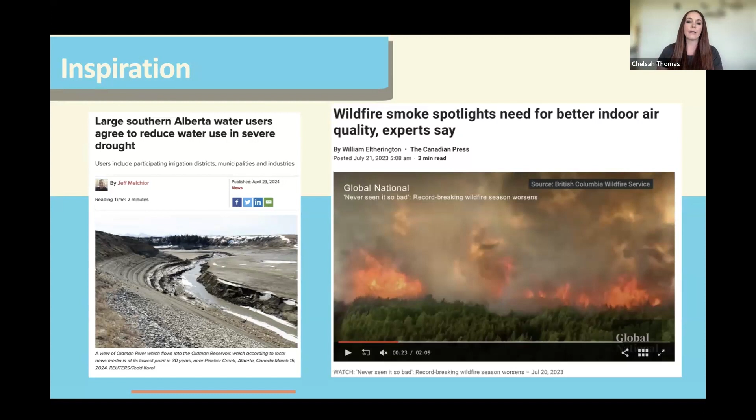So as I mentioned, myself and my partner run Sol Invictus Energy Services. We founded in 2016, and the development of our company was based on the premise of the pillars of sustainability, where we wanted to create a company that focused on energy efficiency and renewables, while also acting as a social enterprise to target energy literacy within my community. This is part of the reason why I'm here today and why I engage organizations like Alberta Eco Trust, individuals and businesses in sharing what I've learned.

After completing university, Jesse and I were looking to build our own house, but we couldn't find any local consultants who were knowledgeable about passive homes or net zero homes. And I know now there's an extremely knowledgeable and great network of experts within the industry who are passionate about high performance buildings. But at the time, it was incredibly difficult to find anybody to help us.

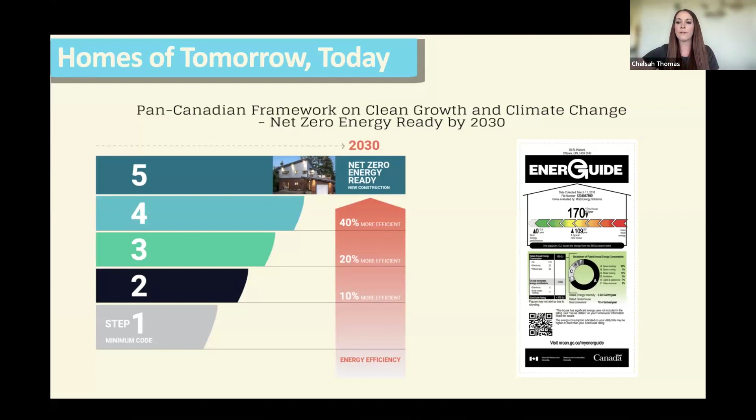Passive House, as I'm sure many of you are aware of, is one of the highest standards for building efficiency. However, my day-to-day work involves assisting homeowners and builders in meeting the basic minimum requirements in order to comply with building codes or energy targets for various programs. A recent report by Energy Efficiency Canada stated there's a tension between minimum standard building codes and an implicit goal within the Pan-Canadian Framework to promote market transformation towards highly efficient and low carbon buildings. We feel this effect every day in our day-to-day work.

The introduction of NBC 2020's Tiered Energy Code introduced the building industry to different strategies in achieving higher levels of performance. This will help the transition toward higher performance homes for new construction and bridge the gap toward net zero ready within 10 years. However, Alberta unfortunately did not eliminate the previous code pathways, making the Tiered Energy Code optional. So far, we have yet to see any projects be built under the Tiered Energy Code here in Alberta, at least in our circumstance. The tension that Efficiency Canada references is on display here, with little incentive for builders to innovate or upskill. And again, this is my opinion.

So moving forward, I've always been passionate about sustainability, self-sufficiency, and holistic practical solutions to environmental problems. When we were looking at alternative home designs as we planned on building our own home, we considered everything from constructing an earthship, which some of you may not be familiar with, but they're very interesting, to gray water systems for our domestic water usage. In the end, we decided to construct our home more conventionally while focusing on the practical application of high efficiency principles in a way that can be replicated simply, cheaply, and using locally sourced materials and expertise as much as possible.

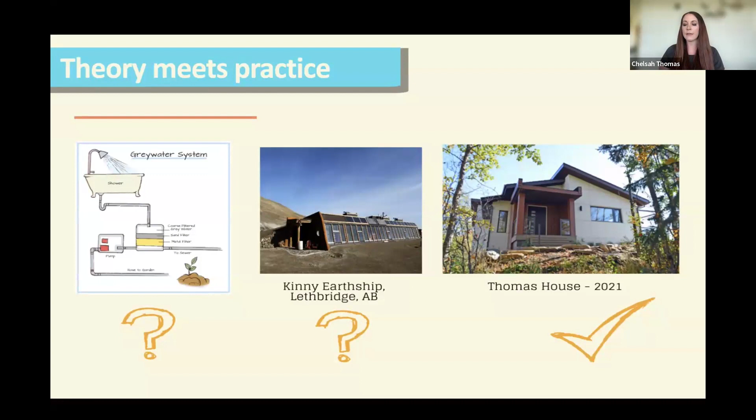So our own project, the Thomas House, was constructed in 2018, located here in central Alberta. It was built using the principles of passive house, topped with solar panels, and generates as much energy as it consumes, making it Central Alberta's first passive solar net zero energy home. There is one other net zero home here. Although it was designed and built using passive house theory, it did not meet some of the stringent passive house requirements, but I consider it a damn near passive house. It's a great example of a high performance home.

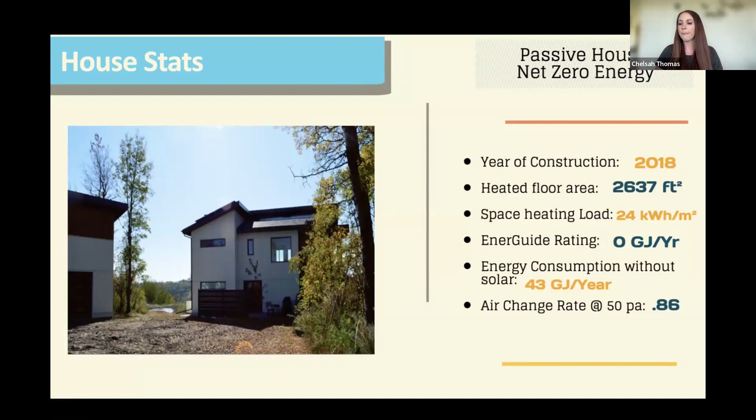The reduction in energy consumption is achieved through thoughtful design, insulation, high performance windows, increased air tightness, and the elimination of thermal bridging. We heat it with electric heaters and a wood stove when necessary. We installed a high efficiency HRV, heat pump, hot water system, drain water heat recovery, and other technologies. We have 3 solar systems on the property, one on the roof, one on the ground, and one that powers the water well. The house is served by a hybrid solar system, so it's got a backup battery pack in order to protect the home from outages.

Some additional features of the property related to sustainability include a large garden, xeriscaping, fruit forest, chickens, and rainwater harvesting. By conducting site development with conservation in mind, fewer trees were cut and less land was disturbed than a conventional build may have incurred. We used existing ecosystem services located near the site, such as natural runoff pathways to areas that can manage excess water by absorbing it. Site selection was also important to incorporate as much south-facing glazing as possible for both solar PV and passive solar gains to help heat the home.

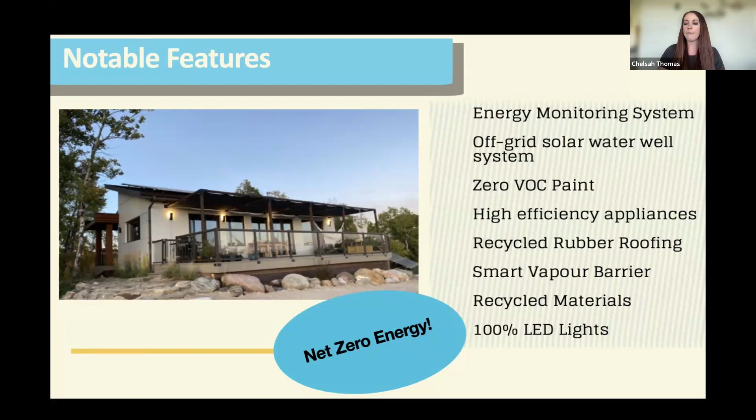So one of our first priorities was energy security and self-sufficiency. The second was cost savings and a guaranteed price of electricity. And we knew that part of this process was to build a very low energy home while offsetting consumption with on-site renewables, resulting in lower greenhouse gas emissions. This tied into our plan to live sustainably, not only in our home, but in our way of life. And it helped us gain points through our B Corp certification as we work out of our home office. Lastly, we also wanted to take advantage of the many other benefits of building a high-performance home, and some weren't even initially thought of, such as increased health, comfort, durability, and future-proofing.

To be self-sufficient and energy secure was one of our top priorities. This was important because we wanted to ensure that we were less reliant on the electrical system. Power outages have occurred in our area for multiple days on end, and severe weather is going to increase. In order to withstand the effects, having a hybrid solar PV system that was both grid-tied and battery-based was important to us. This electrical design of the home included allocating certain mechanical, lighting, and plumbing features either to the grid-tied or the off-grid systems. If grid electricity were to be inaccessible during low light times, the backup solar system and batteries would engage, and appliances such as the heaters, HRV, stove, hot water tank, select lights, and internet, of course, would still work.

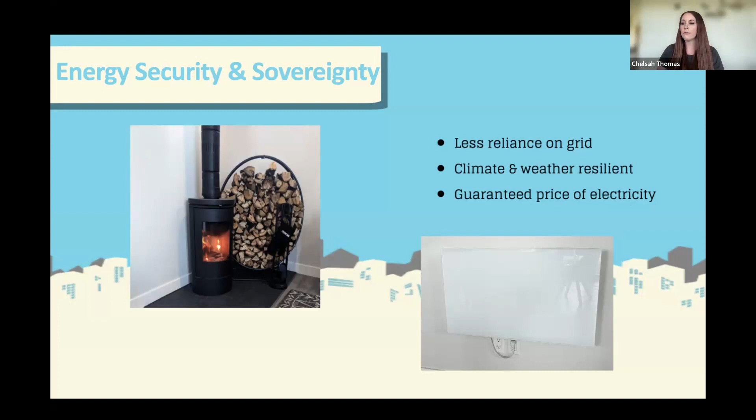So as many of you are already aware, there are many, many benefits of building a high performance home over and above the previous reasons mentioned. Although I appreciate that our motivations to build this type of house may not necessarily reflect the average consumer, more of these benefits are becoming consumer expectations rather than options. These expectations will be driven through technological changes, higher consumer education, a wider range of features marketed by builders, and code adoption. Because of our experience building this house, we tend to attract a lot of clientele who have similar perspectives and want to integrate some of these features as we did into their own homes.

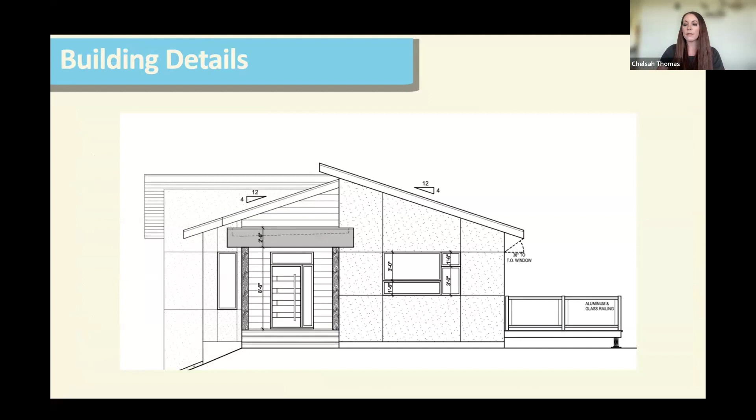So we've lived in our home for almost 6 years. The lived experience has provided us justification in continuing this work for others. It's incredibly comfortable, efficient, and checks almost all of the boxes we had intended when we first planned the design.

The home was built with a double stud wood frame with 1-foot thick walls. The windows and doors are Passive House certified, extremely well insulated, and have been designed to let in as much solar gains as possible on the south side and west.

The building envelope is also breathable in that we used a smart vapor air barrier system to assist in moisture moving through more effectively and reduce moisture buildup and prevent mold and long-term structural damage. We insulated the attic, slab, and walls 2 times what would normally be installed.

The house is very airtight and was tested using a blower door test to ensure that any leaks were identified and fixed before we drywalled. The wall assembly is broken down to show various components here.

So we used a double stud wall system, as I mentioned, with a framing filled with R14 Rockwool batt and another layer of R14 batt in between. We chose Rockwool because of its recycled properties, fire resistance, pest resistance, and insulation value. We also insulated with batt as we wanted to take advantage of the sweat equity and did all of the insulating and air sealing ourselves.

We chose Hardie panels as we wanted to improve the durability of the assembly as we face hail damage and, what we would find later on, tree damage during large storms. Luckily, the tree that fell on our house did no damage, but we are currently under a tornado advisory, so fingers crossed.

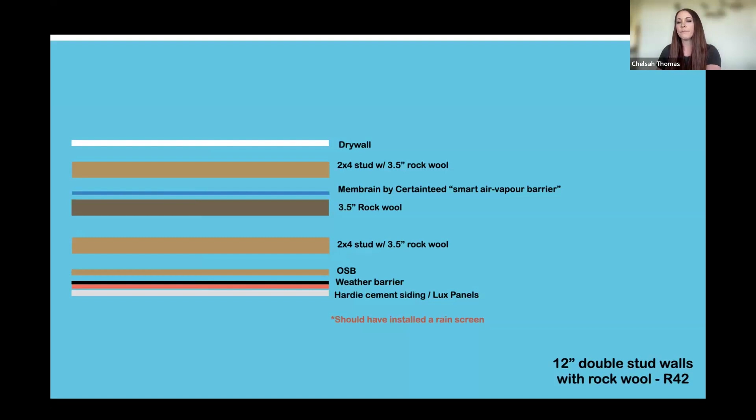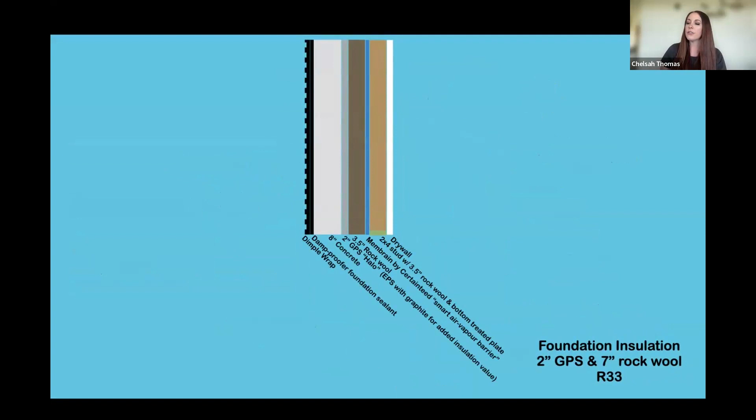So the foundation assembly included 2 inches of GPS and 7 inches of Rockwool insulation. It's broken down to show the various components here. This includes exterior damp proofing paired with dimple wrap to help shed water away from the foundation. We installed 2 inches of GPS adjacent to our foundation, which is vapor permeable, allowing any water intrusion to be dried out to the interior.

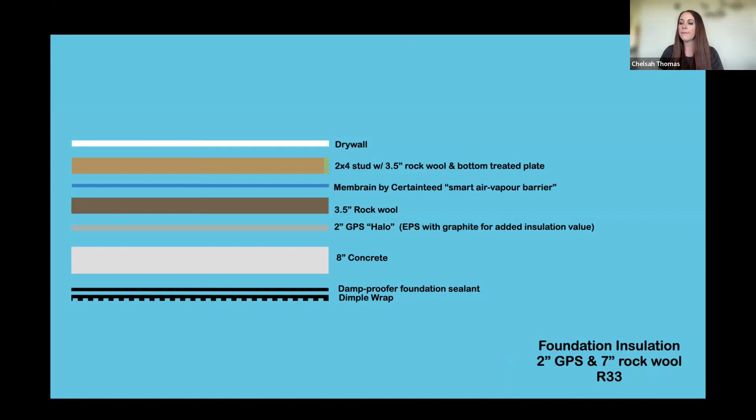We installed 3.5 inches of continuous Rockwool batt with another 2x4 interior wall insulated with another layer of Rockwool, and the smart air vapor barrier continued throughout the basement. Our header was insulated with 5 inches of spray foam and the cavity filled with as much leftover batt as we can stuff into it, around R40. The slab included 3 inches of GPS.

We initially had planned for about 5 inches of EPS, but didn't plan the footings properly to accommodate the added insulation. One thing I would have done differently was to install poly over the footings to stop capillary action and moisture movement up into the foundation wall. This is noted in the red line on this slide. It would have been a simple and cheap action to take to prevent further moisture from intruding into the foundation. But I don't believe the concrete company that we were dealing with at the time had even thought about that.

The second regret is to not create a thermal break around the slab and exterior foundation wall with the addition of 1 or 2 inches of GPS or EPS. There's a few locations on the walkout side of the perimeter slab that can get quite uncomfortable in the wintertime, and additional details and planning would have been required for us to complete that step.

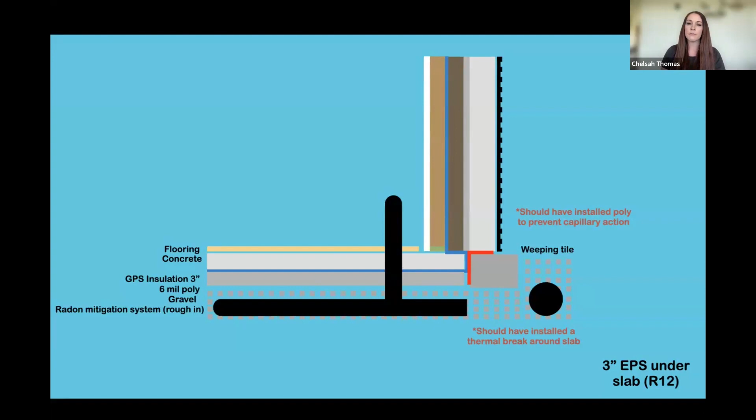So another reason why we wanted to design this house is cost savings, both in yearly utility cost savings as well as the long-term payback period. And I'll be honest, I didn't really know how things would end up over time, as it's difficult to estimate true energy consumption and generation of a home due to changing climatic conditions, occupant behavior. We ended up adding a few items to our house later on, and utility credit changes, energy cost changes, and other variables.

However, after analyzing our costs, credits, and upfront premiums associated to building a high-performance house, I do know that we made the right decision. There were additional costs of the project compared to a conventional build that were incurred in order to meet the higher performance level. This includes more insulation and lumber, higher performance mechanical systems and appliances, additional consulting and testing fees, tapes, adhesives, better performing windows, and the solar itself.

The analysis did not include the costs associated to the batteries and off-grid solar or costs associated to rural development. I also adjusted for economy of scale advantages that a builder would benefit from and that we could not benefit from in relation to time spent building the property and as well material costs.

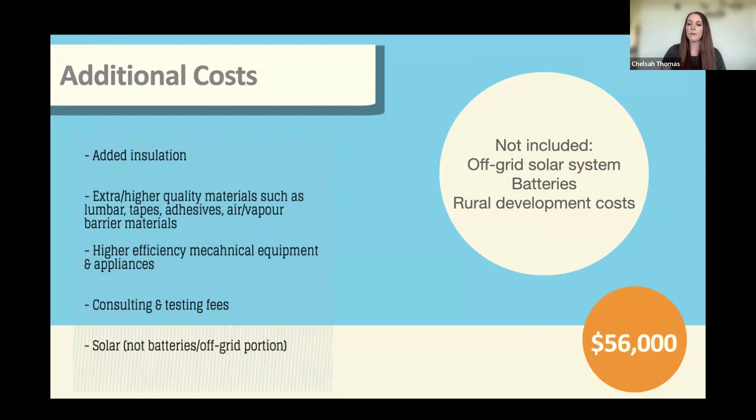So in the summer, the solar system generates more energy than we consume, and we receive credits toward our accounts.

Oh, sorry, for some reason I skipped a slide here.

There we are. Those credits go toward our energy costs, and we utilize Solar Club pricing through our energy retailer, which allows us to switch between generation and consumption months in order to maximize our credits. During the summer of this analysis, we purchased and sold our electricity at almost 26 cents per kilowatt hour, while in the winter, we purchased and sold at 6.5 cents per kilowatt hour. When we first built our home, our solar credit pricing was at 18 cents, and now it's 30. So it's gone up over 10 cents in only 5 years, while our winter price has stayed the same.

I analyzed 2019's energy data for both solar production and consumption, as well as costs and credits incurred through our utility company. 2019 was actually a poor year for generation compared to other years. But as you can see here, we average out about net zero for that year.

Looking at the average charges per month, I compared our build as if it was built conventionally and as if we had met passive house standard. You can see on average our daily costs are the lowest, accounting for the higher performance build and solar energy credits in comparison to the other models as shown.

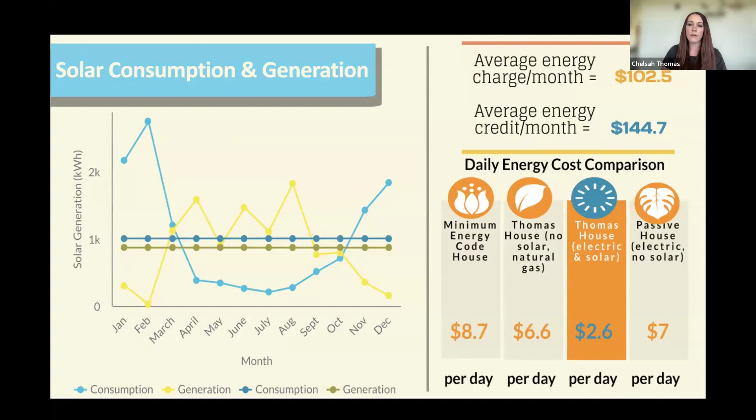Over time, this project will pay for itself in approximately 20 years compared to the same house, but built to minimum energy code standards. The payback for this project accounted for all fees and energy costs associated to each model's energy sources, as well as grants received during the construction process for solar energy. There are currently no grants for solar on existing homes through the federal Greener Homes program any longer, unfortunately. 20 years for us is reasonable; as they like to say, there's no payback period for granite countertops.

Now this is also a snapshot in time, and as the energy prices increase, if solar credits increase or the energy system transforms to encourage behavior changes to reduce consumption, the payback period may become even shorter. Since this analysis was conducted, the credit price for solar has increased by 5 cents, which will reduce the payback period even further.

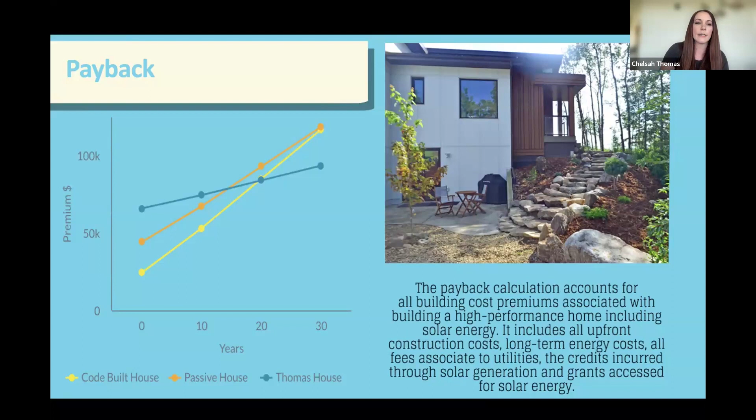And keep in mind, these numbers are stale. The cost to build has increased since we did all our planning in 2015 and 2016. So just take that into account when you're reviewing this slide.

So some data shows that the average length that a homeowner stays in their home is about 7 to 8 years, with a median length at 13 years. A 20-year payback for us is reasonable, as it is our forever home. However, even if it wasn't, I'd like to view this investment as reasonable, as the upgrades would still be marketable, retain their value, and transfer to the new owner. With homes standing up to 100 years, investing in a better envelope makes the most sense, because it's the least likely and costliest portion of the house to be replaced or updated.

Investing in building better quality buildings now translates to cost savings in the future when it comes to replacing or updating our housing inventory.

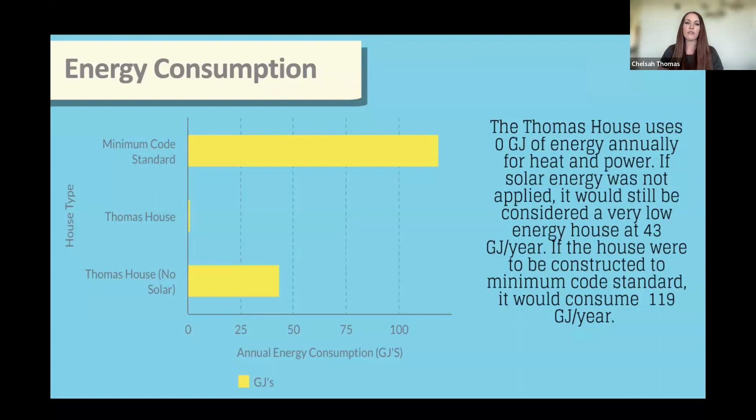So what I also did was I took a look at, sorry, give me 1 second. For some reason, the results of the poll that you did, it's not removing from my screen. I found this on the web. Forgive me 1 second. Oh. And Siri wants to tell me. I'm wondering if anyone else is having that problem. I did stop the poll, but yeah, I'm not sure, but I will just explain what's going on in the slide anyway, with that covering my screen. Maybe if I just get out of here, there, that'll work.

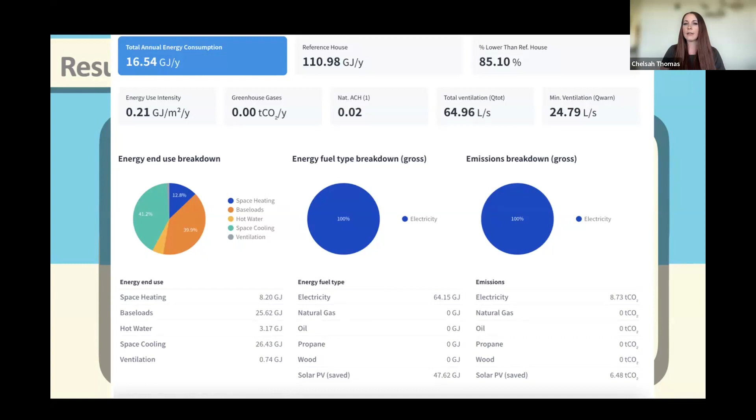So as you can see, when we add in the heat pump system, the loads change quite substantially, and we do have quite a large cooling load in relation to our heating load. And that's kind of what you're going to see as we move towards higher performing homes. We're going to be designing homes more for cooling rather than heating as the loads tend to increase.

So another goal for the project was sustainability, of course. So we wanted to reduce our environmental footprint as much as possible. By producing more than we consume for energy, we also reduce our greenhouse gas emissions. And this house is estimated to produce 16 tons of CO2 annually without the solar energy. But since it produces as much energy as it consumes, we actually mitigate these greenhouse gas emissions, and we barely produce any. The solar energy installed will save about 3.5 passenger vehicles taken off the road in 1 year, or under 18,000 pounds of coal burned.

If this house were to be built by minimum code standard, it would generate 34 tons of greenhouse gas emissions, 7.5 passenger vehicles, or 37,000 pounds of coal. And over the course of 40 years, we will take about 300 cars off the road with our house alone. Although when we built our house, embodied carbon wasn't a huge topic of conversation, we did end up choosing many products with lowered embodied carbon.

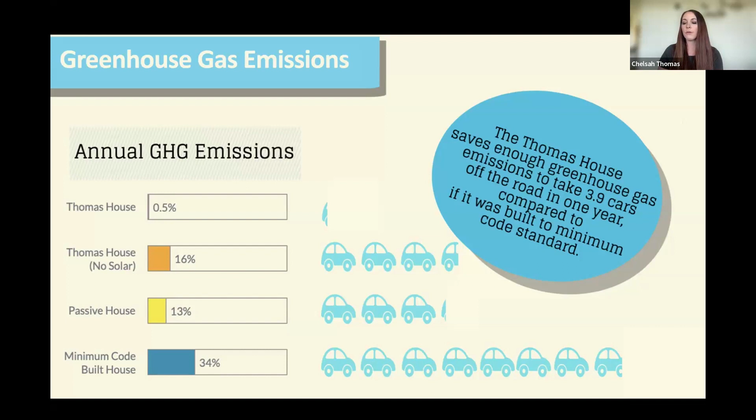If we were to go back in time, we would consider different materials like straw as our envelope. There's a great product out there that uses prefab wall systems called Savic Wall Systems here in Alberta, and they've been one of the assemblies that I would have strongly considered. Secondly, we would have considered locally manufactured windows rather than from overseas due to transportation emissions. However, when we did source our GPS and EPS, we got it from Beaver Plastics, which is manufactured locally. And Euro Shield rubber roofing is recycled and manufactured in Calgary. Rockwool batt, of course, is recycled as well.

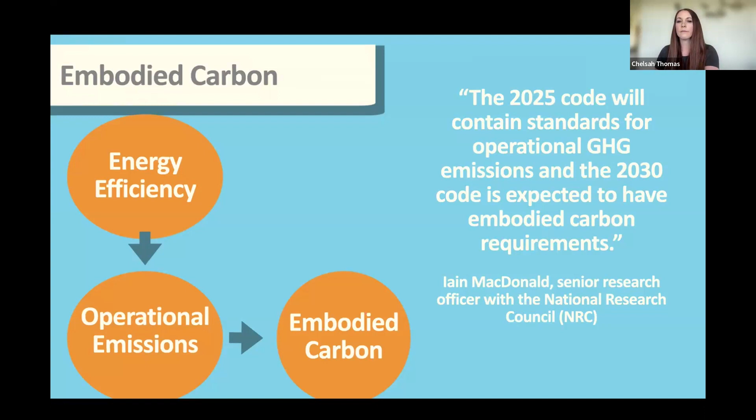So no project is complete without reflection on what we could have done and what we could have improved, and this one's no exception. After we've lived in the house for over 5 years, the lived experience is truly the testament to the benefits and results of a high-performance home. This project missed its goal in achieving Passive House standard.

On one hand, the results show that economically, meeting the standard could have added further savings on utility costs, but by meeting their air tightness requirement alone, we could have saved $40 a year in heating costs. We could have taken other efficiency measures to meet the criteria as well, but it would have increased our overall build costs as well.

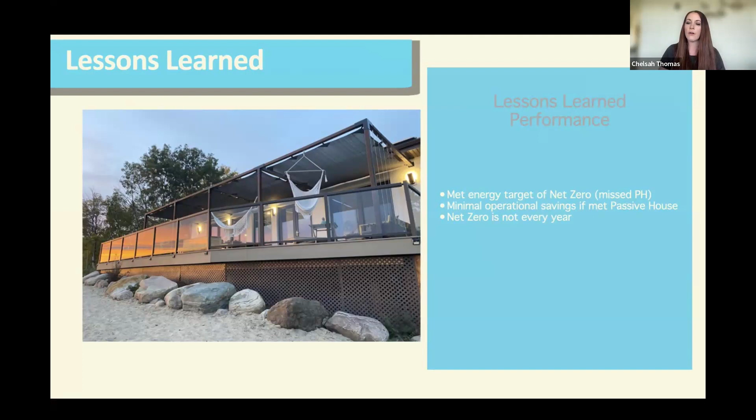After watching a few years of utility data, we know that net zero is not net zero every year. Some years we hit it, some years we've been net positive, and some net negative. And since then, we've added another appliance and a heated chicken coop. So we're trending towards net negative going into this year. And if we ever add on an electric car, that's going to be another added consumption device. We do have years where the smoke impedes on our solar generation during the summer, and we've added 2 new occupants to the home, which apparently use up more electricity.

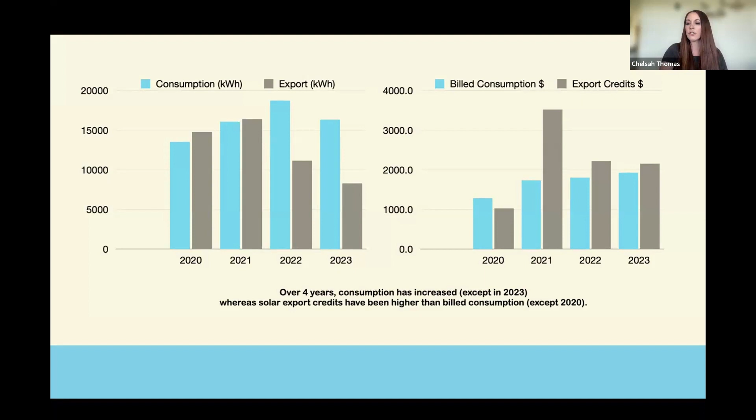So data tracking over the last 4 years shows more recent generation and consumption trends. We use more in energy, but receive more credits back on our bills. As you can see, some years we're net positive and net negative, but we participate in Alberta Solar Club so we can maximize our solar generation. The outlier in 2021 was due to an abnormally good summer for solar generation.

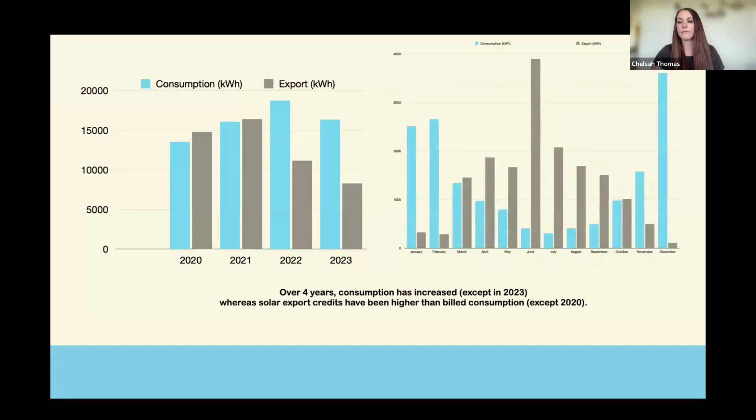Oh, and that's not showing up. Oh, there we go.

I'll just touch on this. This is just straight out of our utility bills. You can see one of the best months for solar generation credits, and then one of the worst months for electricity costs. Although this is only in the last 2 to 3 years, I have had better years and I have had worse years. I just couldn't go back in time to show what our costs and credit differences are.

But one note, when we are building electrically, I do recommend to install solar because the cost of electricity is so high, and even in a very high performance home, you could have up to $600. In our case, I've seen up to $600 for costs for energy fees, which is recouped later in the summer, but it does happen.

So there's not a lot of opportunity for theory to merge with practice, and designers and energy analysts having the opportunity to project manage and physically be a part of the construction process. However, this process provided that experience. Unfortunately, we're inexperienced home builders, and oversights that would have been taught by an experienced builder were realized. One example is the additional insulation we had planned to include in the slab, and it didn't fit, so we had to reduce the depth.

Another example is that the plumbing and chimney protrusions on the south side could have been planned for more carefully to the other roof orientation in order to ensure that all of our solar could fit on the south roof rather than split between south and west.

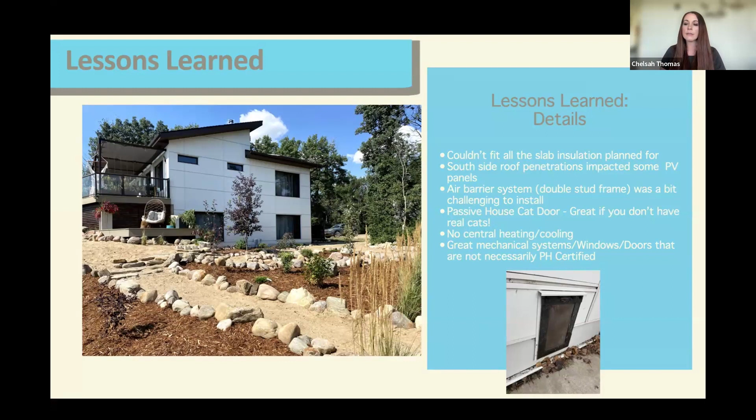Now that we're accounting for embodied carbon into the designs, unless you're going for certification through Passive House, I would maybe consider other options. Internorm makes a great window and door package as well.

So another area of improvement is incorporating higher level of expertise into the design process would have assisted us in achieving Passive House standard at a lower cost. And it's true when they say when you invest in better design up front, you'll save later on. We started working with a Passive House certified consultant later on in the design and construction process, but honestly should have started with that designer from the get-go. Our designer of this house was Passive House familiar, not qualified, and it did lead to some unintended consequences later on.

So the previous point is especially important when considering renewable energy. The least expensive form of energy is energy conservation, and by maximizing the energy savings on this project, our solar system could have been reduced even further. The balance between conservation and production should have been weighed more heavily on the conservation side for two reasons: to reduce the costs associated with larger PV systems and mechanical systems, and because roof space is limited. If I were to go through this process again, I would have invested more time in going through a process called optimization and energy modeling.

And that's where you can dig into the home energy upgrades and compare the impact of different options, such as the straw wall system versus the double stud wall system that we did. My understanding and ability to analyze the impacts on energy upgrades versus solar costs or mechanical options has also improved.

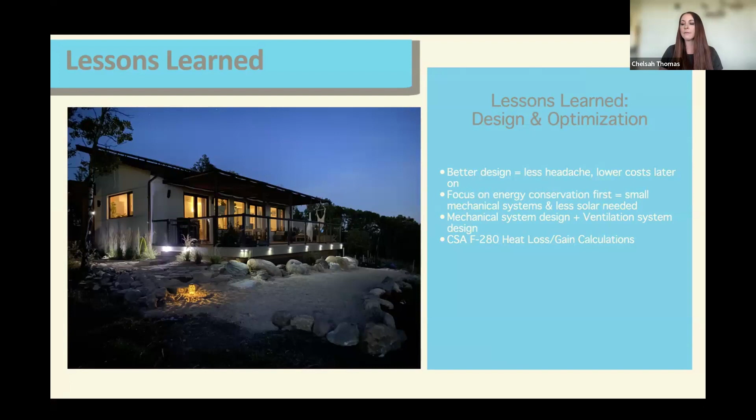Maybe looking at ICF or other wall system designs, exterior insulation. But at the time, I just was not experienced enough to be able to do that. And I didn't have access to really cool software like Volta Snap that we do now. I now really realize how beneficial energy consulting is during the process of building when considering the house as a system and taking the whole building perspective.

So this is an example of optimization. This is basically a comparative analysis of our house, but integrating some different features. So you don't see all of this, but you can see how making slight changes impact the primary space heating loads. And as well, if we were to go through the whole process, you'd be able to see greenhouse gas emissions estimated on solar panels, comfort assessments, heat loss and gain calculations, energy costs, and much more information.

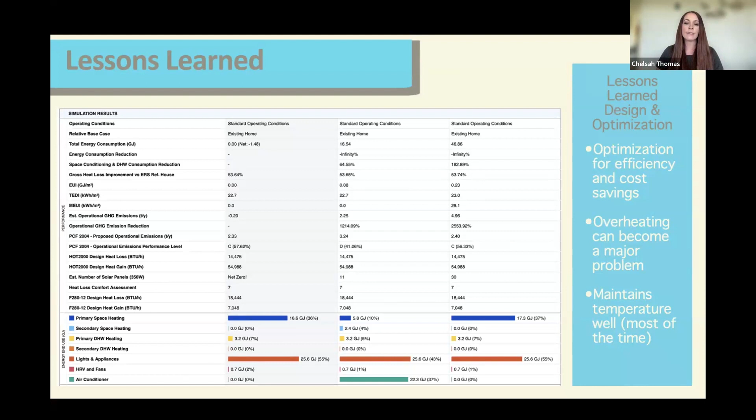So this simulation is done by Volta Snap, and it's something that energy consultants are slowly getting access to. And it's a huge tool and opportunity for us to be able to really fine tune projects, goals and needs, and see what the outcomes are to these decisions.

The home achieved all of its other goals identified in the design process, as well as additional benefits realized later on. During the shoulder months of the fall and spring, where sunshine is plentiful, like right now, we rarely ever have the heat on. The home is so airtight, and we utilize all these passive gains that we rarely have to turn on any heat, even during the nights. Between April and October, the house is retaining enough heat to stay comfortable.

Passive ventilation techniques were applied as much as possible, which included opening windows for cross breezes or opening a downstairs window and an upstairs window to utilize stack effect and natural ventilation. Utilizing the cool night air in Alberta is an excellent form of free cooling. However, further analysis should have been conducted in order to get a better understanding of our cooling needs.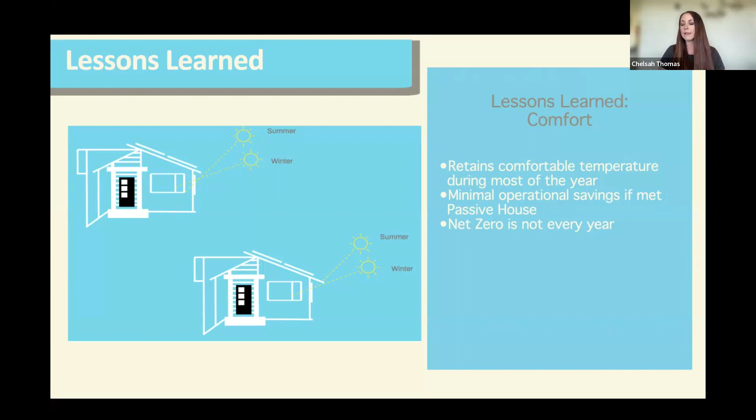You can see the energy consumption. Oh, and actually we've already gone through the energy consumption results, but the total energy consumption of the house, again, is net zero while accounting for our current energy consumption and generation capabilities. But it was our personal attempt to do better in this world. It opened up a lot of opportunity for us to continue to work in the community and better understand home energy and renewables, as well as help our own clients in meeting their own energy goals.